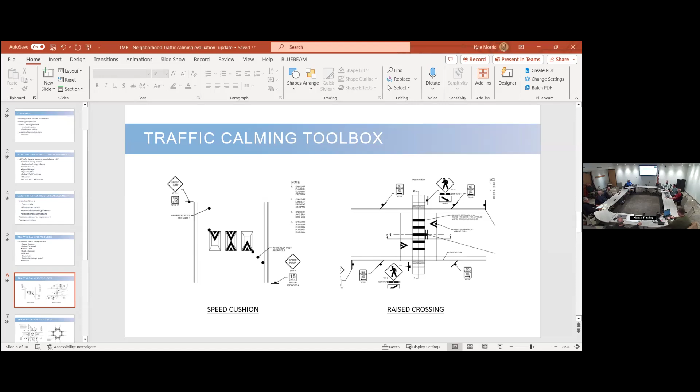I will ask, since I get to be dictator for a day, or whatever my job is for this - we're going to try... what's that? The dictator's right. What I'm gonna ask is let's hold questions until the end of the presentation so we can note it down, just to try to keep things smooth. I notice a lot of times questions are asked about a slide that's two slides ahead - if we just held on for a few minutes, we'd get answered. So unless that screws up the way you'd like to present.

No, I'm generally okay with questions, but I do like that. I think when I get to the sheets with treatment details, I'm not sure it really translates to you guys on a plan view, so I 100% welcome questions when we get to these slides that aren't in the package. These are updates - I'll let you guide when questions come. Okay, at the very end, and then I'll take over.

Sounds good. All right, so I'm Kyle Morris. I'm an engineer with the transportation group specifically, so I work with Shane and Aaron every day.

Thanks for sticking it out. Yeah, they really test me sometimes. Like before this meeting, when Shane was like, "I need 15 copies of the presentation."

Anyway, I'm here to talk about the neighborhood traffic calming evaluation and recommendations toolbox that we are developing with David Evans and Associates as the consultant. I'm the PM on the project, but we have pretty much our entire transportation engineering and planning group involved, so we get all voices heard within our group, and it's not just my engineering mind being heard all the time.

Moving on. So the first topic is the existing infrastructure assessment, a big overview. Existing in the city of Littleton, there are over 80 traffic calming measures installed since 1997. This count in the report specifically is 79, but that was prior to us installing several pilot projects with delineators and C curb, so I just went ahead and wrote over 80.

These existing traffic calming measures include traffic calming islands, which are the islands on the exterior of the road that create a smaller cross section at various points; pedestrian refuge islands, so center refuge medians for pedestrian crossings; traffic circles; speed humps; speed tables, which are similar to speed humps; raised pedestrian crossings, which are speed tables combined with pedestrian crossings; chicanes, which give a horizontal deflection in the roadway; and also applications of C-curbs and delineators, which I'm sure you've noticed us installing a lot over the last year or so as pilot projects, particularly at trail crossings, around schools, and park crossings.

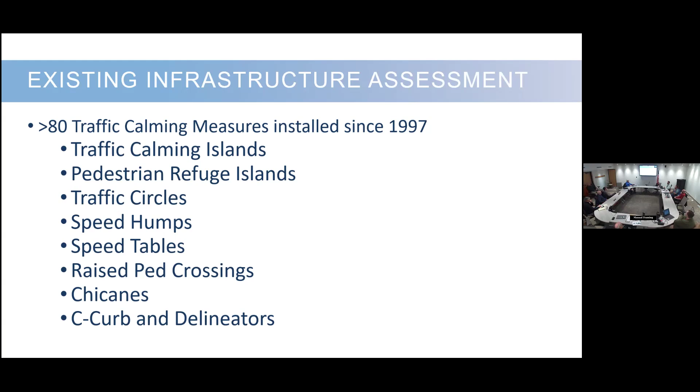Moving on, the evaluation looked at several different aspects of these existing traffic calming features, starting with speed data. We use a service called Urban SDK, which is phone-based data. We use that as our first application to get relative speeds from around the city.

That then triggers a more in-depth study for precise speed data collection. They also looked at physical condition - is it falling apart, does it look brand new, is it good? They looked at existing treatments for lane width and crossing distance, and observed several locations for user compliance and visibility at crosswalks. One thing they looked at at almost every location was how parking interplays with it and affects visibility.

From these evaluation criteria, they provide high-level recommendations for improving existing traffic calming treatments. The large takeaway from the existing infrastructure assessment is that vertical treatments, as currently designed, tend to work pretty well, but we need some work on making our vertical or horizontal treatments, like chicanes and traffic calming islands, more restrictive to make people feel less comfortable driving at a higher rate of speed.

Can you go back to the speed cushion slide? By the way, is that like the best name for a punk band ever? Speed Cushion.

The speed cushion is essentially a speed hump, but you're shrinking it on the outsides a lot of times to make room for, say, bike lanes. You're also making cutouts for emergency vehicles. Typically, the center one will have arrows going both ways, and that'll be applied in the center of the road, so there's not really an opportunity for vehicles going down the street - if there's traffic on both sides - to avoid the speed cushion and use those cutouts.

Those cutouts are for emergency vehicles. So you see how there are three separate cushions? In between is basically just roadway, designed to work with the wheelbase of fire apparatus. If you had a sports car and tried to do it, you'd rip out the undercarriage.

I thought that was what that was. I think it was in Aurora - I was on a road next to a school where they had something like that, and I watched 4 cars in front of me peel into the bike lane to go around it. There was plenty of room, just enough for a car to get through. If it was a biker, they would have been toast.

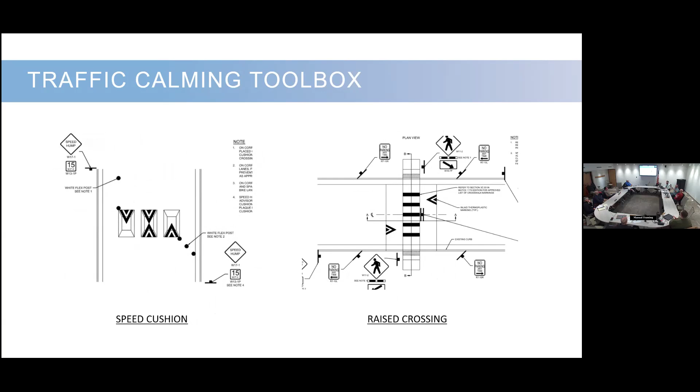And accessibility - one of the big benefits for accessibility is pedestrians don't have to ramp down to street grade and back up; they just maintain their grade the whole way through. I think having cars go over it, signaling you are entering a pedestrian space, is a very good practice. So for wheelchairs, particularly going down those ramps, like the ones downtown - they get hammered by snowplows.

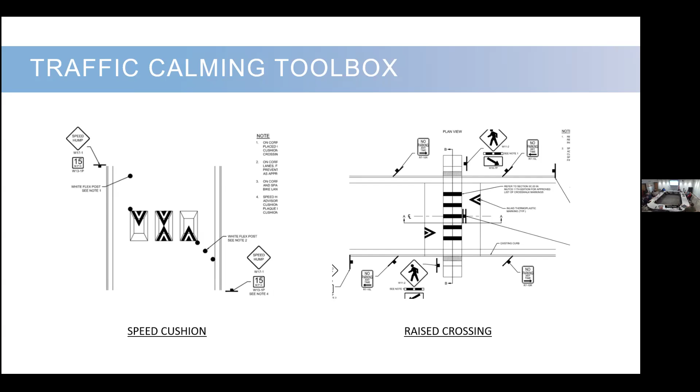Moving on to the next treatment, we have traffic circles. You'll notice several differences in control signing - it being yields compared to our existing ones with two-way stop control - more roundabout type signage, but at a traffic circle.

One thing that didn't make it onto this snip is the extra guidance for a larger inside radius. A good example is, say you have a 36-foot street width - good for our local streets - with a 15-foot curb return radius, which is the radius that goes around the corners of the intersection where the ramps are. That would, with our recommendations right now, result in a 27-foot diameter circle.

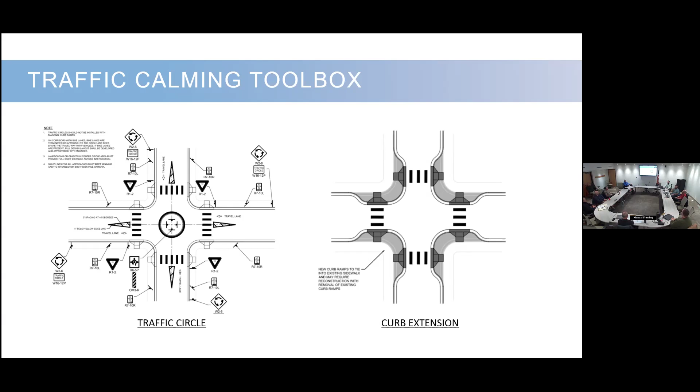Kelly asked, what is daylighting? You're the expert — I'm just a layman. Sure. So basically daylighting is looking at the approach to a crossing or an intersection and eliminating parking or anything that could block sight triangles, so you can see someone waiting to cross the road or see a car coming in another direction. It's just pulling back where parked cars are allowed a little further, so you can see further.

A lot of safety. And then also, the great thing about the curb extension is that it's a much shorter distance for people to cross as well. So I saw someone with a walker crossing Littleton Boulevard. They made it about halfway during the countdown for them to be in the crosswalk, and they were stranded in the middle of the intersection. I was like, we have failed that person, when I saw that.

So I think the refuge islands are good examples of making it better for those situations. Happy to see those. One thing not touched on too heavily in this presentation, but many of these treatments, particularly the curb extensions, is a good example of — they've also provided guidance for quick build/pilot project layout. We've already done several of these. Euclid is a good example of doing curb extensions with plastic curbing and delineators.

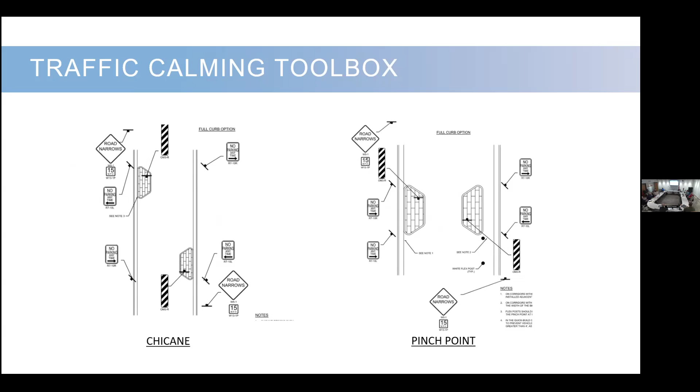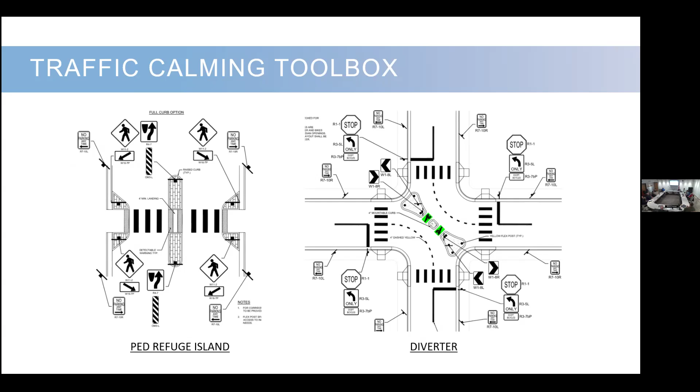All right, that's the end of the treatments. My last slide is just a heads up on the location designs.

That's all I have, so thank you.

Any other questions? I followed Jeff's instructions and wrote my questions. Thank you, I appreciate that. Sorry, we have no time for questions. Give everybody some candy. Everybody did a great job.

Thank you. So, I have a concern that your evaluation missed out on one of our primary traffic calming tools, which is dips. That's how we calm traffic on Easter. That's how we calm traffic in front of the library. It's the most effective way to slow people down, one muffler torn out and you slow down. I'm actually thinking about this evaluation from the communications standpoint, and the face validity of the evaluation is missing when one of the main real traffic calming things we use is not part of the evaluation.

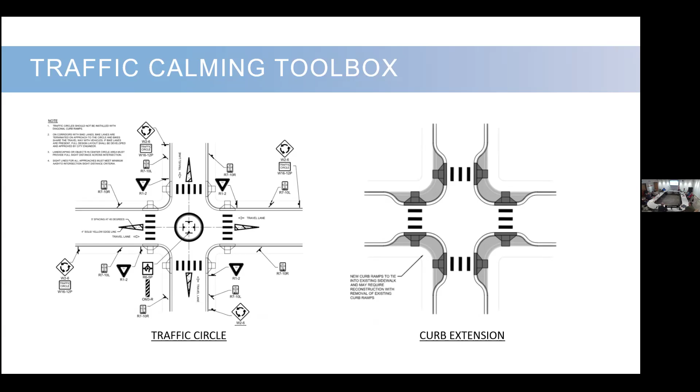So the next topic on our agenda, which we've talked about a couple times now, is the TMP needs to be updated. 2026 is the year to do it. We need to provide input to that process, and we decided that in order for everything to move efficiently and smoothly, we need to get our input in by July, at our July meeting. So call it 5 meetings that we have in that window.

So the next part of this is, certainly we're gonna have some openness. There's no preset plan for how we're gonna do that. We need to figure out what our process needs to be. There are some high level questions we need to address, member by member but also as a whole board: what kind of education do we need in order to feel like we can do that effectively? What type of input from staff do we feel like we need in order to do that effectively? So, what do we need to do to get going?

And then the next part is, how do we want to do that? Do we want to just dedicate 2 or 3 meetings to provide all of our TMP thoughts and input? Or do we want to split up over the 5 meetings, maybe into subcommittees, having 2 people work on 1 or 2 sections each, and then come together with recommendations that the whole group can weigh in on? Those are just some ideas we've had.